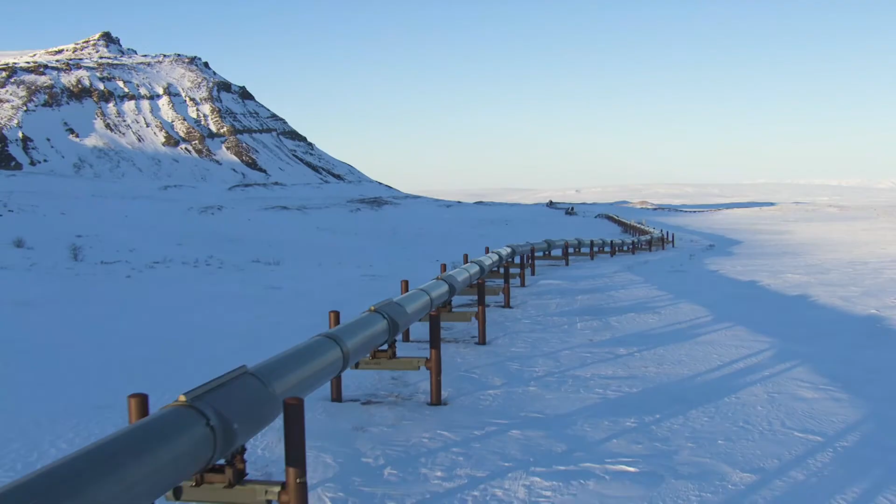Just to give you a little bit of background on me. I've been with Schneider Electric, or Foxboro as it was, for 7.5 years, and I became the offer manager for the level instrument product range in February of last year, right in the middle of COVID, a great time to change roles.

But for most of my time with Schneider Electric, I've been in sales as a district sales manager for the whole process instrumentation portfolio, looking after a region known as NESA locally - Northern Europe and Sub-Saharan Africa, meaning the UK, Ireland, the Nordic countries, and largely the English-speaking African nations. But my time with this organisation isn't limited to that, because prior to that I was part of the sister company Eurotherm in their UK sales team for 6 years. So I've got quite a lot of experience with Invensys/Schneider Electric as we are now.

And that forms part of a 25-year experience that I've built in automation sales and marketing. I started with sensors and safety, moved into more mechanical automation products, conveying and power transmission, smart vision systems and sensors again, data acquisition and process control with Eurotherm, of course. Now instrumentation sales with Foxboro or Schneider Electric, depending on what you prefer to call us, which brings us bang up to date.

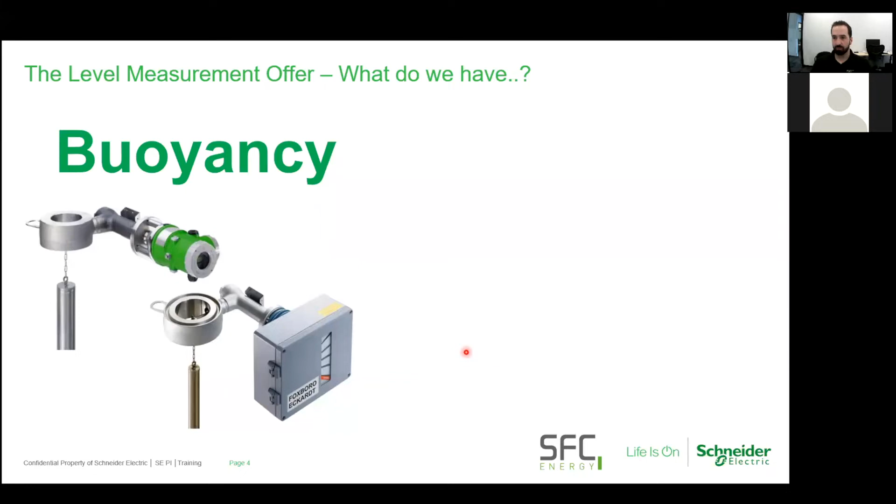So the first question I'm going to pose here is, what is a level measurement offer? Well, we have two strands to this. There's the buoyancy level transmitters, which is former Eckardt brand, then Foxboro Eckardt, and now Schneider Electric. But we're not really going to talk about that today - I'm just showing you that for context in terms of where the radar offer sits within the portfolio.

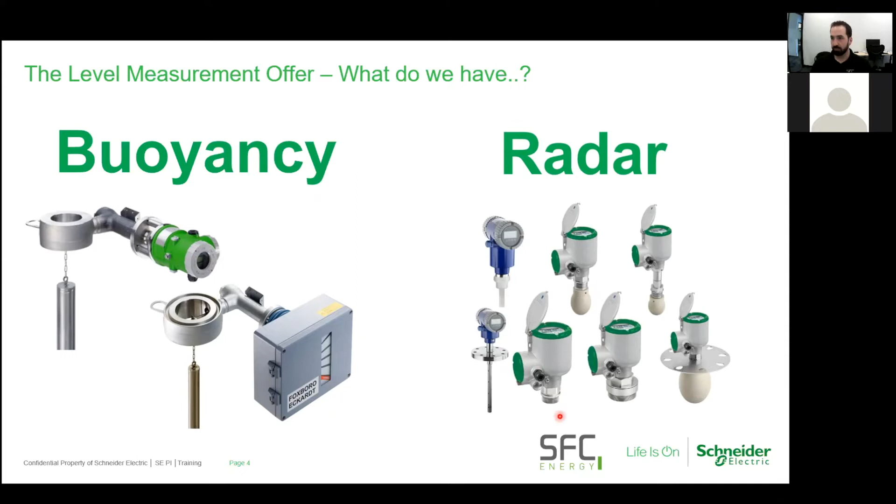So really, there are two major streams to our level measurement instrumentation package, and today we're going to focus on radar. If any of you are wondering, questions are absolutely welcome - please put them in the chat or wait till the end, because I'm going to have about 5 to 10 minutes at the end of this presentation where we can go through some questions. And if we overrun, because we get into some good discussions, then all the better.

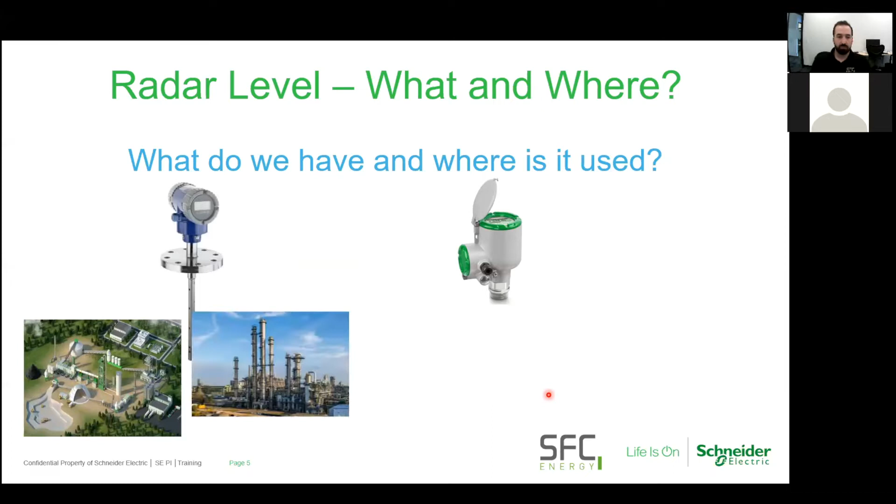So you've seen what we've got, but let's drill down a little deeper into that. Let's not only look at what we've got, but where can we use it? Where can we sell it if you're in sales? Where can you deploy it if you're an end user? Where would you integrate it if you're into systems integration? The pictures you see on screen here are really just a portion of all the applications we could solve with this instrumentation.

As you can see, we've got free space and guided wave radar instruments that are used for liquids measurements in tanks, in open vessels and open channels. And we've got solids measurements for drums, silos, conveyor belting, stockpiles, and even pressurized containers for liquid measurement also. So I'm going to get into more detail on some of these interesting applications in a few minutes.

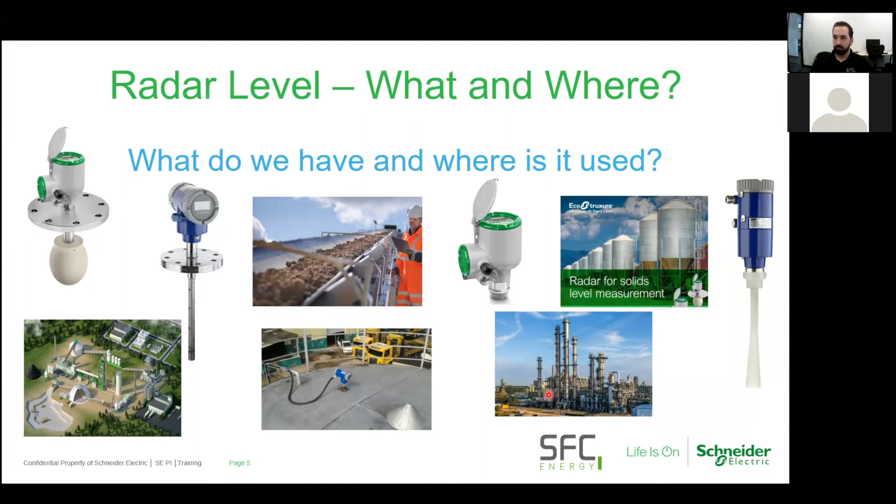But before I do, let's touch a little bit on the technology that I'm describing today. This is not intended to be, and hopefully won't become, a technical lecture about radar measurement level technology - we've done that before, and I'm sure we'll do that again. The focus today is going to be on those applications.

Just to give it all some context, I am going to talk for a couple of slides about why the Schneider Electric radar level measurement instrumentation is worth investing in, and how it is differentiated from what else is out there.

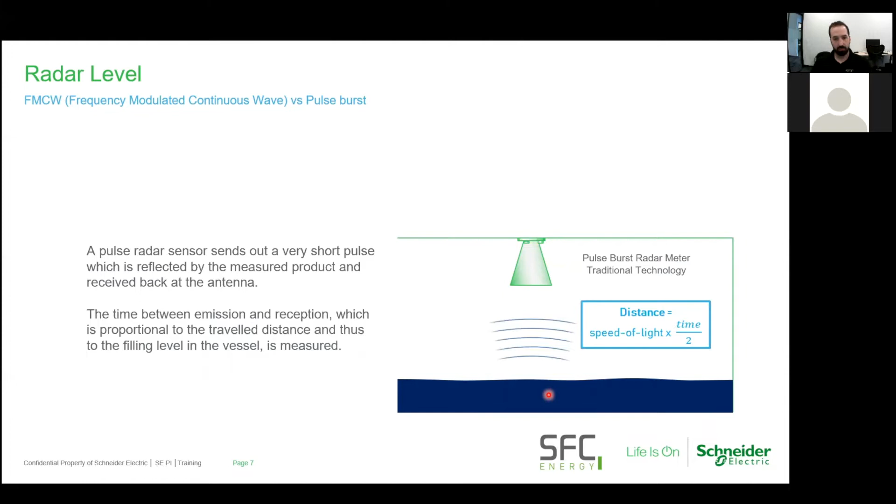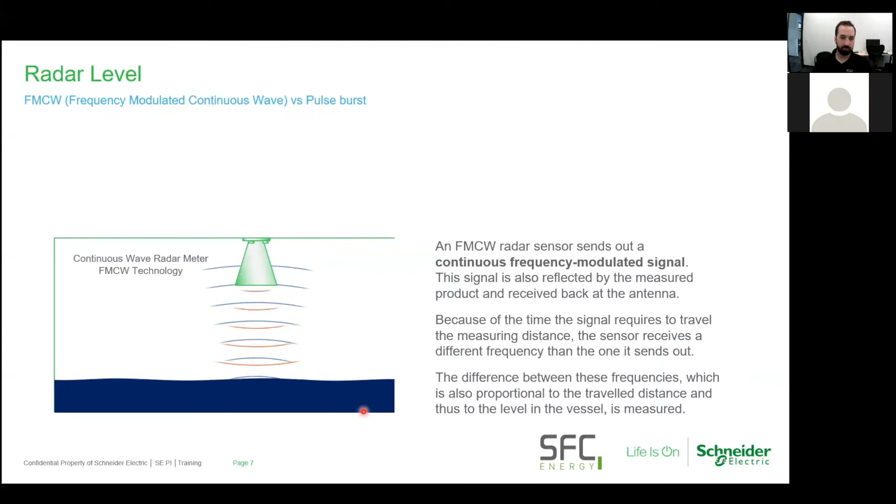We prefer to use this FMCW, continuous wave technology, and the important bit is the M of this acronym, the fact that it's a modulated continuous wave. So we are continually pinging the surface with a signal, and because of this modulation of the signal on reflection back to the receiver, we don't measure time of flight. We actually measure the change in frequency, which gives us a much more reliable measurement for the distance to target, and much more immune to any spurious reflections or noise. So this is a far more reliable technology than the old pulse burst method, which is why we utilize it.

The benefits you get from continuous wave as opposed to pulse burst, you can see the left and right here, is that you're getting much more frequent reflections, a much larger input of signals into the receiver, so you've got a much more robust and strong signal and a greatly improved immunity to noise. So any measurements you do with our radar range are extremely reliable compared to pulse burst technology, and effectively about 100 times more reliable if you count the number of signals received as a measure of reliability.

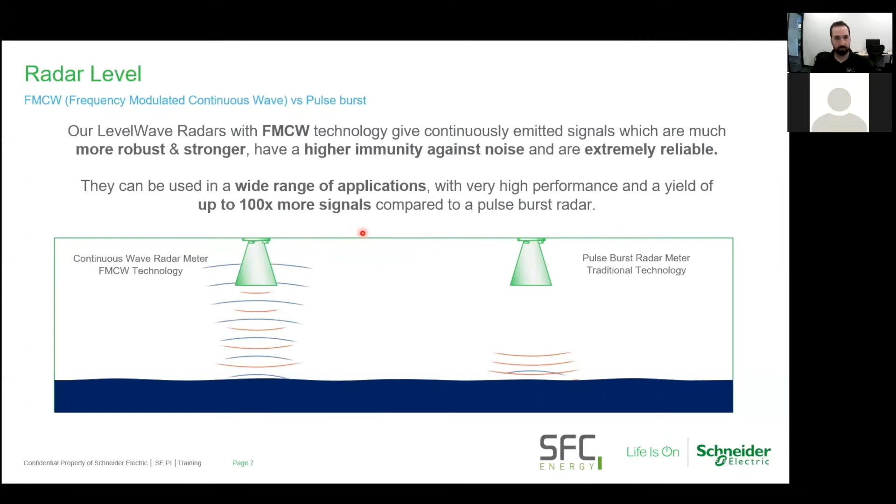So that's a little bit about the technology, and as I said, this isn't intended to be a technical lecture, so let's actually, before we get into the applications, have a quick walk through what makes up our range.

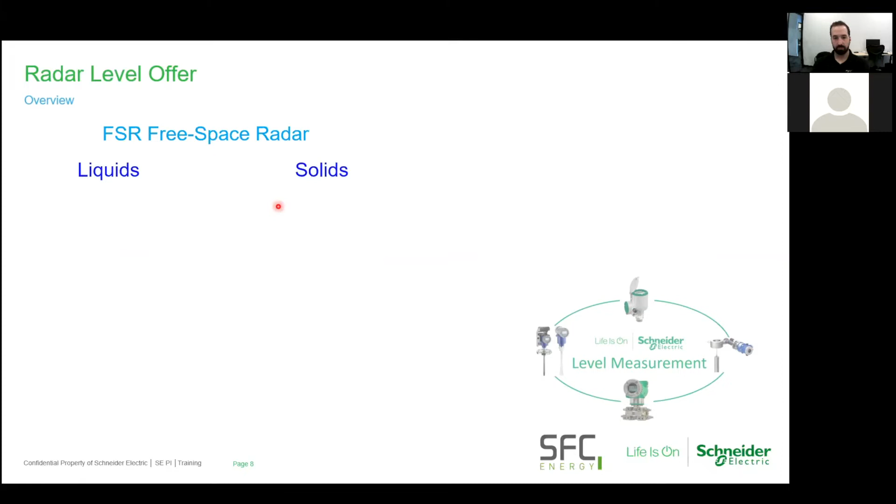So first of all, I'm going to focus on the free space radar. So that's the kind of instrument you just saw in the graphic on the previous slide, the kind of thing that is employed in the front or maybe the rear of your car for distance sensing radars on your motor vehicles.

So for liquids, we have a range of 4 models here, over 3 different frequency bands. The first model, one of the first 2 models to come into the Schneider Electric Radar range was the LR01, which is a 10 gigahertz radar. And this radar is really still very much a key part of our range, because even though it's older technology compared to the ones on the lower half of the screen you can see now, it still finds many applications. It has some distinct advantages in some areas, and I'll come on to those later. But the 10 gigahertz range is perfectly suited to measuring static liquids, so storage tanks, water, drums, and not so much process applications, but more liquid storage. And it's not really designed for measuring solids levels.

But a few years ago, about 3 or 4 years ago now, we greatly expanded the Schneider Electric Radar range with the introduction of 24 and 80 gigahertz band radars. Now, in 24 gigahertz for liquids, we have 2 models: the LR54, which I like to think of as our kind of entry level or standard offer. It's the place where I would start if I'm looking at a new radar level application. I'd start with LR54 and work outwards from there.

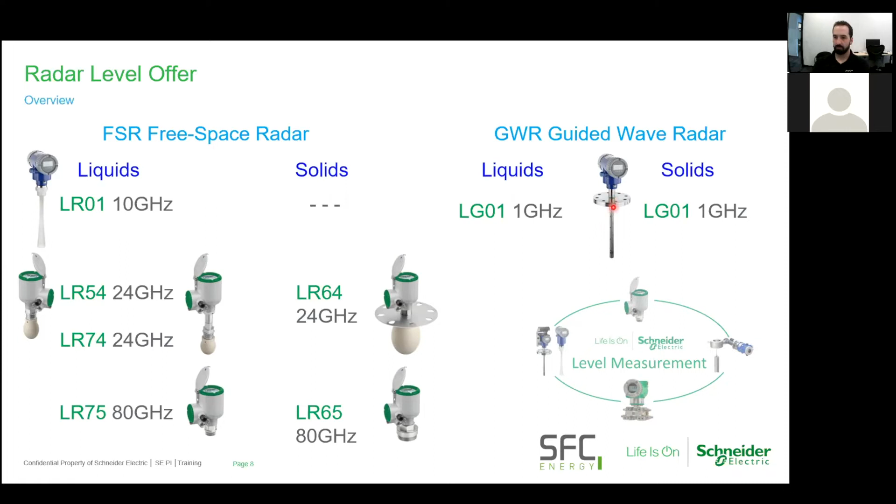So let's now get into the really interesting bit - at least I find it the most interesting, and I hope you will too - the applications where you can solve people's measurement needs with the products I've just walked you through. First, I'm going to do a few exercises on theoretical measurement applications. I have actual case studies to show you shortly, but the purpose of this part of the webinar is to demonstrate the effect that the geometry of your vessel and your process connection can influence which instrument you choose and which antenna you pair with it. So let's go through this process.

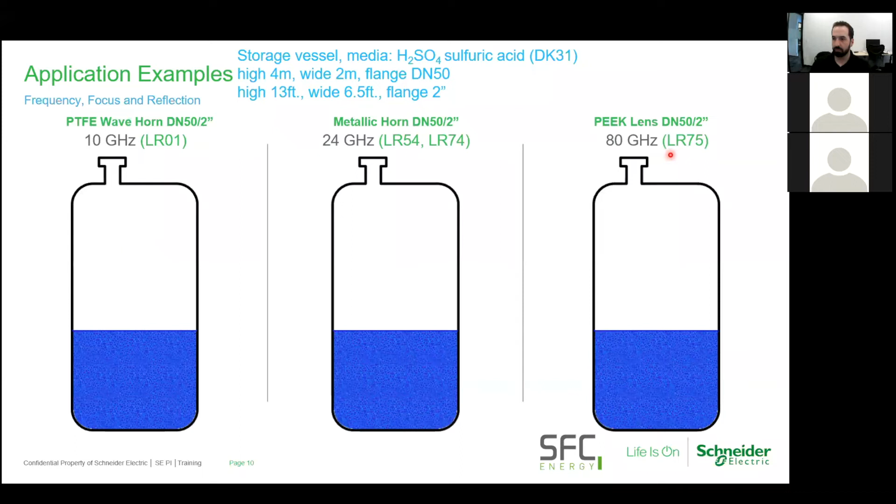For the 24 gigahertz variant, we have 2 models to choose from, LR54 or 74, and again the 2-inch connection really takes us towards the metallic horn antenna. Lastly, the 80 gigahertz radars, both of which have lens antennas, and a variant is available with a 2-inch connection. So let's have a look what that does to our measurement scenario.

As you can see, all 3 devices will adequately measure the level. The influence of the antennas obviously dictates the width of the beam over the measurement range, and even with the lower frequency - the wider beam angle of the 10 gigahertz radar - we could pretty much get close to the bottom of the tank. We may choose to employ the empty tank spectrum algorithm, available in all of our radars, to effectively ignore the curvature at the bottom of the tank, making LR01 effective. But as you can see, the 24 and 80 gigahertz radars both have no problem with impinging on the tank walls, so both would be appropriate for this application.

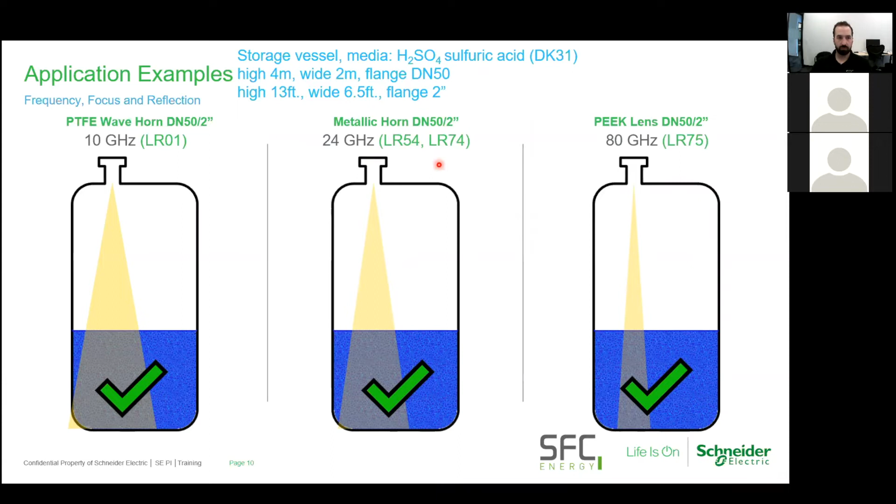So which one would you choose out of these? Well, sometimes the answer isn't technical, sometimes it's commercial, and in that I would veer towards one of the 24 or 80 gigahertz devices, because I don't want to have anything to do with the sidewalls of the tank. I would opt for the 24 gigahertz LR54 because it's perfectly suited to this application, will give us a good strong signal, doesn't impinge on the tank walls, and the LR54 in particular is the better priced option. Obviously what we want to do is not just solve your problem technically, but give you the best commercial solution that will do so. So LR54 would be the choice here.

So let's have another look at one of these worked examples. It's the same tank dimensions, but this time we're looking at aviation fuel with a lower dielectric constant - it's below 2, you notice. And this time we have a 4-inch or DN100 flange connection on the same vessel.

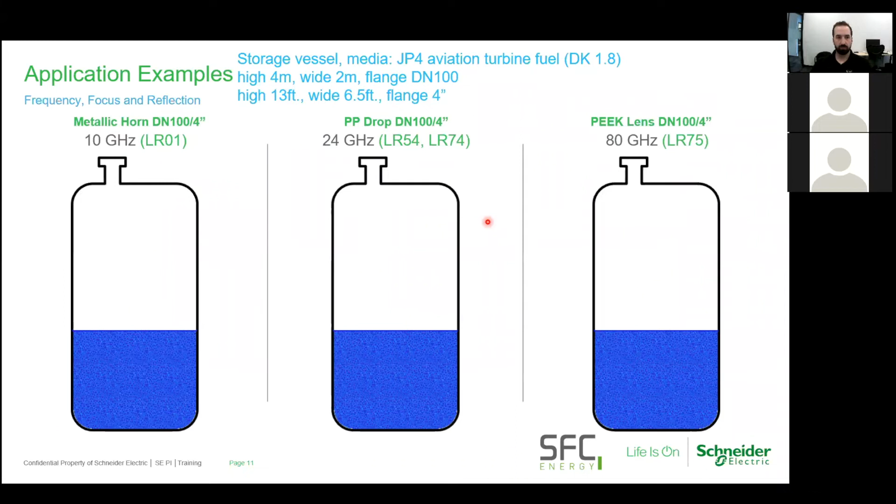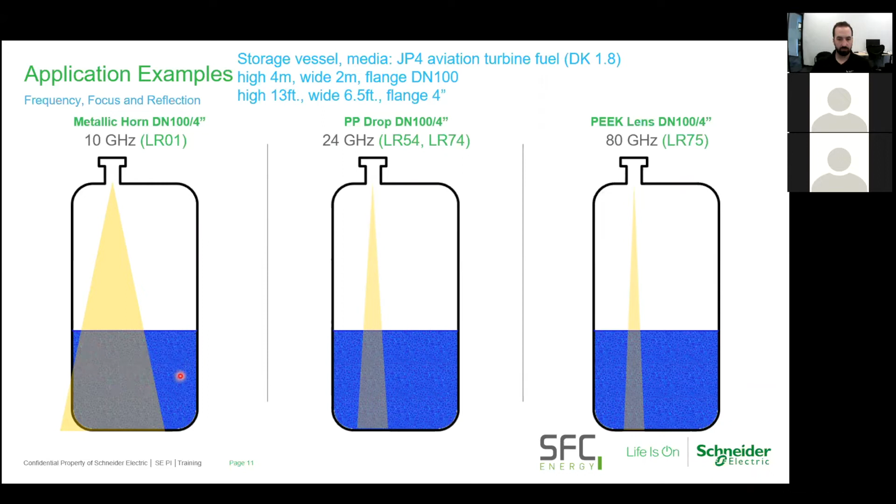If we choose the LR01, this time with a 4-inch metallic cone antenna, we get a little bit more beam spread, a wider beam angle than we had in the previous case. So we may want to consider whether we use this. You can use this device in this application, utilizing the empty tank spectrum software. But I would, again, just like in the previous example, choose to use either the 24 or 80 gigahertz radars. Now, in that, we are nowhere near the tank walls in either case.

Again, my cost-efficient mind would say, okay, 24 gigahertz is good enough, let's go with that - it's lower priced than the 80 gigahertz. Then do we choose the standard version, LR54, or the higher spec version, LR74? Well, when we look at what we're measuring, and this is aviation fuel, I would opt for LR74. It's a higher priced device, but it has a quick-change connection so you can actually remove the transmitter while the device is connected to the process, and it also has, as an extra safety feature, a metal-glass barrier between the antenna and the transmitter, which gives you an extra level of protection in the event of a potential explosion.

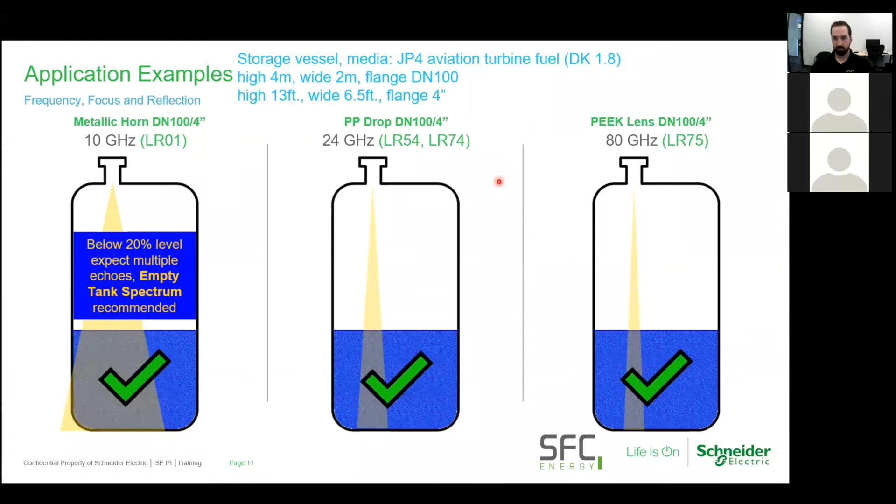I think we've got 2 more of these theoretical examples now before we get into the actual case studies. Hopefully you're finding these interesting.

This time we're looking at wash liquor, so it's pretty much an aqueous solution, but we've got foam on the surface of the liquid, so this is going to be a little bit more challenging. We've got a 4 meter by 2 meter tank, or 13 feet by 6.5 if you prefer imperial measurements, and this time we've got a 1.5 inch threaded connection.

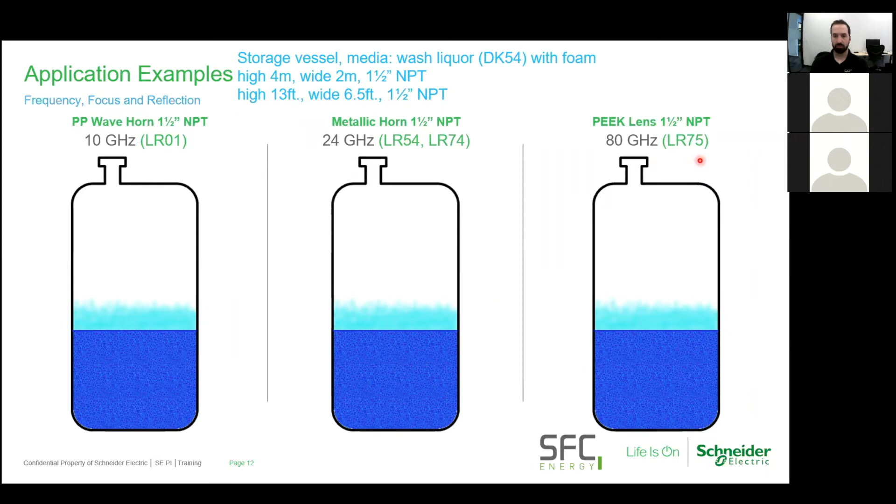So what can we use? We can use the LR01, available with a 1.5 inch NPT threaded, this time a polypropylene wave horn antenna. The 24 gigahertz variant has a metallic horn antenna with a 1.5 inch threaded connection. And for 80 gigahertz, both the LR65 and 75 have lens antennas, and again we have a 1.5 inch NPT variant of that.

So which is going to be more suitable? Well, it looks to me like in terms of beam angle and beam width, you could use any 3 of these. Maybe the lower frequency LR01 isn't ideal if you want to measure right down to the bottom of the tank.

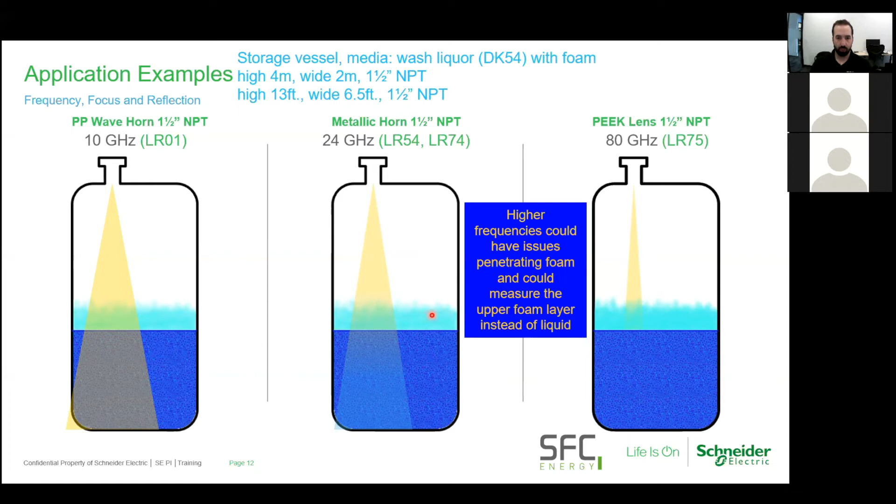But of course, we haven't considered the foam. Now, perhaps counterintuitively, the higher frequencies can give you some problems with foam, depending on the density of the foam in question. You may get some scattering of the higher frequency and therefore shorter wavelengths of the radar signal. So actually, the LR01 might be more appropriate.

But you know what would be even more suitable for anything with foam is a guided wave radar, the LG01, where the signal, if you remember what I said earlier, is concentrated within the waveguide, so it can't really be scattered by the foam, so it will give you a good strong reflection off of the liquid surface. And so that would be my first choice, even though you could, in theory, use any one of these devices.

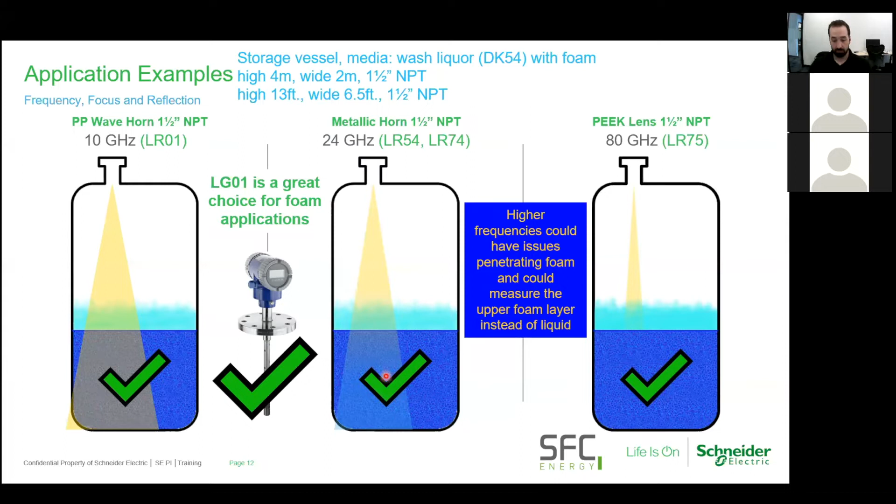You might think, oh yeah, we'll play safe, we'll make sure we don't hit the sides of the tank, we'll go with the narrowest beam, the highest frequency. But this could potentially give us another problem.

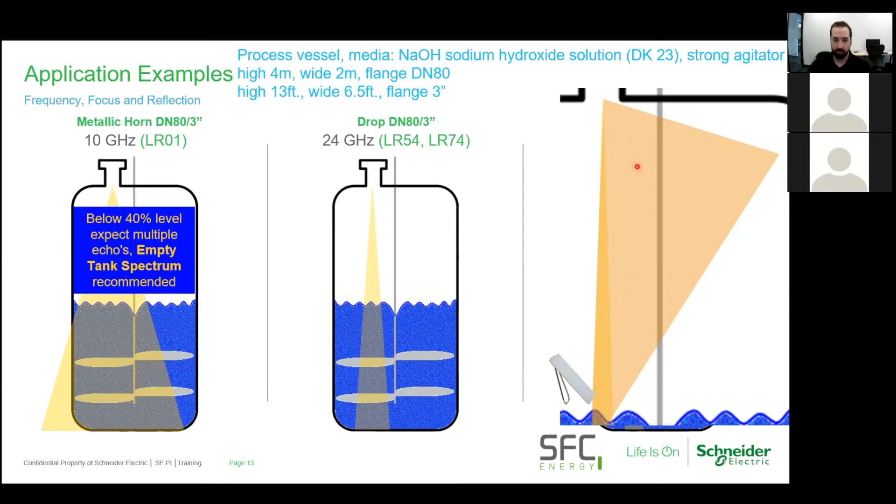When you zoom in, you can see that the ripples on the surface caused by the agitation effectively will act like little mirrors for the shorter wavelength 80 gigahertz radar beam, and reflect much of the signal away from where you want it to be into the transmitter's receiver. So you will get some signal here, but you can get a lot of attenuation of the received signal, so you won't get as much of a strong signal as you'd like.

So really, the one of choice here is the 24 gigahertz radar. It doesn't have the same negative effect from the surface of the liquid. The lower frequency would be best, but of course the beam angle is rather wide. So the optimized answer here is the 24 gigahertz LR54 or LR74.

Sodium hydroxide is not especially explosive, so I'd go with the LR54. That gives you the same performance as the LR74. It's the most optimized for this measurement and the most cost optimized device also.

So you can see there are a lot of factors at play here: price, connection, tank geometry, medium chemistry, and of course other things like agitators and foams.

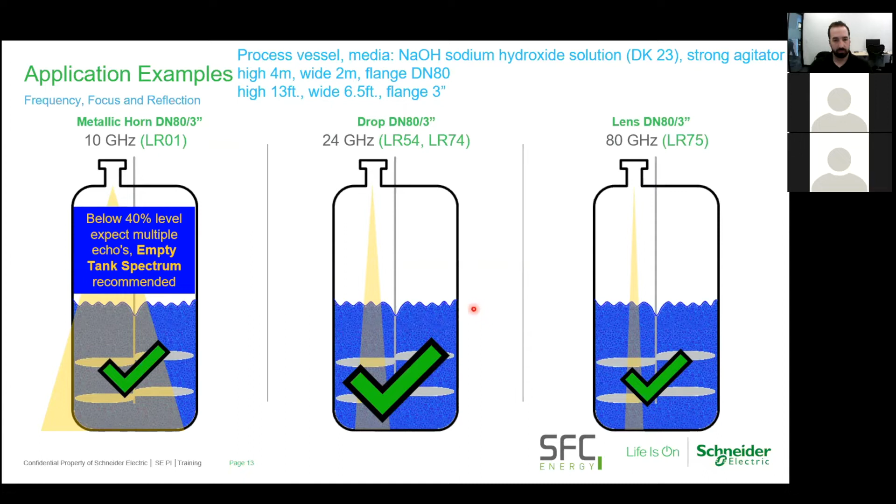What I really like about this drop antenna is that it's optimized for lack of buildup of liquid or dust solids. Unlike a waveguide antenna where you can get a lot of buildup, these are pretty resistant to that.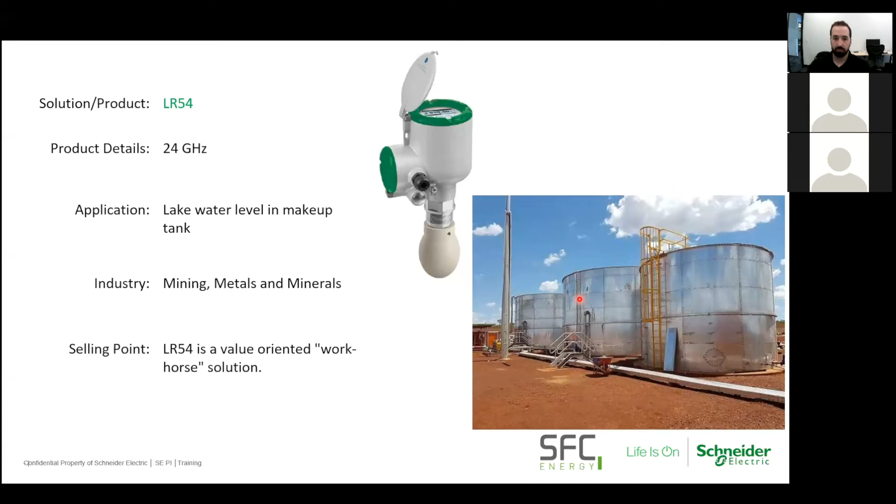Let's look at the next one. This is another example where we used the LR54, but here there's a low pressure flange protecting the transmitter from the process, and we sell a lot of these low pressure flanges, more for device protection than anything else. This is in the chemical industry, where rather than tanks of water, it's a similar kind of geometry - the tank isn't quite as wide, but not too constrictive. We're looking at chemicals that are highly viscous and corrosive, hence we're protecting the device with a low pressure flange.

This customer had previously used ultrasonic level measurement and found it inaccurate and unreliable. Again, it's not too challenging an application - we have a good dielectric constant in the liquid level of this chemical solution. So the LR54 was again the obvious and logical solution to give this customer a reliable and cost-effective solution.

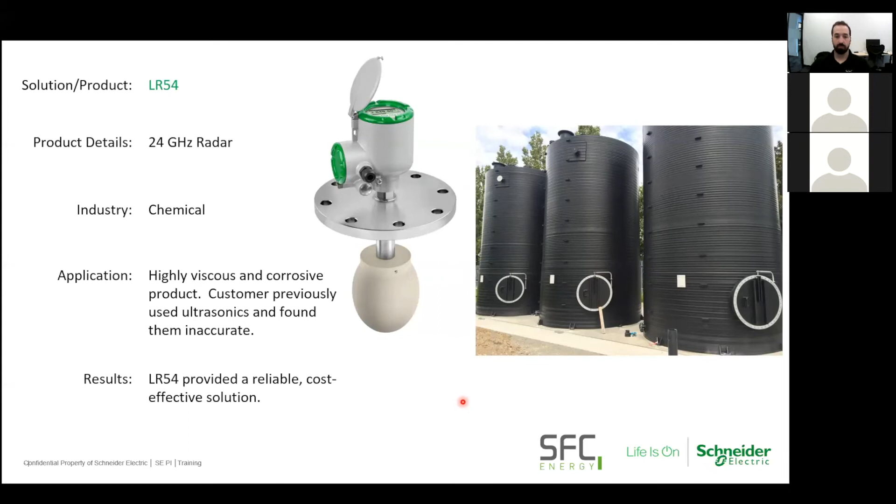Next we'll look at a slightly more challenging one: measuring ethanol in a biofuel production plant. Obviously biofuels are a growing technology, increasingly widespread, and we've managed to get some level measurement success in this sector. In this case we go with an 80 gigahertz LR75 model for a couple of reasons. Let's give a bit of background first.

The customer had been using differential pressure transmitters to measure level, and indeed they still are - just now in conjunction with the LR75 radar, whereas before they used DP alone. What they found was that to do any maintenance on the DP cells, they had to completely empty the tanks to get access. Not the case with a radar transmitter mounted in the tank roof.

The advantage with an 80 gigahertz signal is you can have it relatively close to the sidewalls, because the narrow beam angle allows you to do so. Also, if you've got a low dielectric constant medium like a hydrocarbon such as ethanol, that lower dielectric constant is more likely to be seen by the higher energy, higher frequency of the 80 gigahertz radars. And of course, they are pretty much maintenance free.

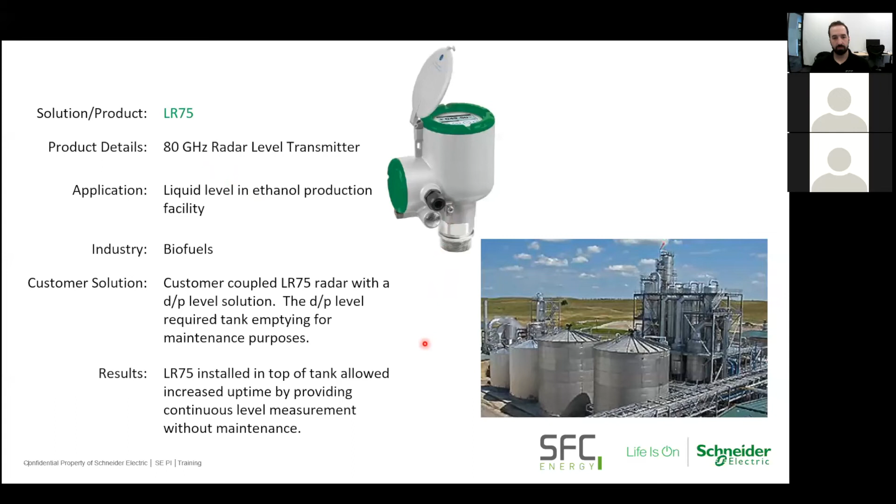Now let's look at an application for one of our oldest radar transmitters. It isn't all about the newer models today, because as I said earlier, the LR01 was one of the first two models that Schneider Electric adopted about 10 years ago. The 10 gigahertz radar is perfectly applicable in many applications, particularly in water - in this case, wastewater. With 10 gigahertz we'll get a good signal of wastewater.

This is in the electronics industry, but the real differentiator, the real winning case for this one, is the fact that you can buy the LR01 as a remote version. The actual transmitter can be separate from the antenna by a distance of up to 100 meters, with a cable connection between - you can see the cable disappearing up to the top of the tank here.

What the customer was having to do before was send an operator up to the top of the tank to check the level measurement - very labor intensive, consuming lots of time. So we've saved a lot of that time now. The electronic display is at eye level, and they can easily do a manual check if they don't want to trust their control system's reported level. More importantly, they're keeping their health and safety officer happy, since people aren't having to climb to the tops of tanks to check liquid level measurements. That's a novel sort of differentiator, but remote electronics is certainly an advantage in this case for the LR01.

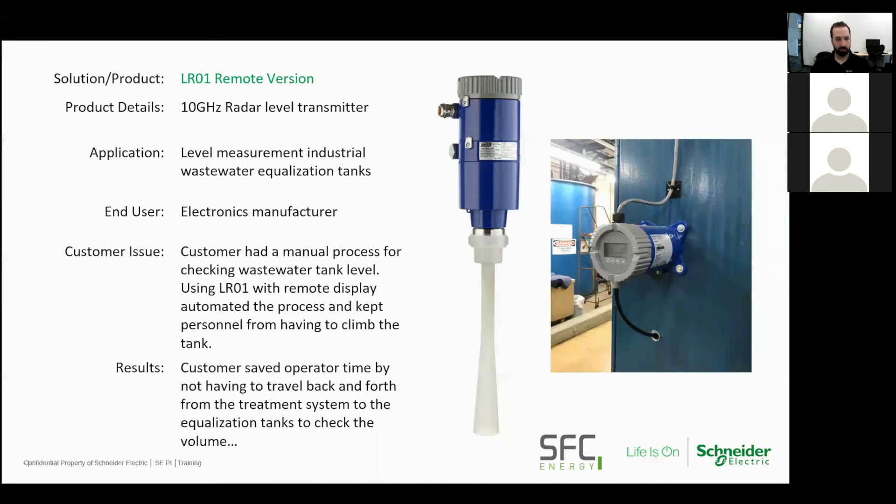So what have we got next? Yes, we're going to take a little break from the applications now, just to have a recap of the similarities and differences between the different models in our radar portfolio.

So on the left, we've got the LR01, which I just talked about in that wastewater tank. 10 gigahertz measures with an accuracy of plus or minus 5 millimeters up to about 30 meters distance. It will get you to 250 Celsius and 40 bar, or 482 Fahrenheit and 580 psi. One of the advantages this model has is its quick coupling. You can remove the top works from the antenna easily while it's still in process, and it has the option for this Metaglas extra safety barrier between the antenna and the transmitter.

And this is also true for the LR74, the eagle-eyed among you will have noticed the same thing here, but I'll come back to that in a moment.

So the LR54, which I described as the kind of workhorse or entry level of the newer radars, more naturally fills the space that LR01 has been occupying to itself for a longer time in our range, but it does have a higher degree of accuracy over a much greater maximum range. It doesn't go up to as high a temperature rating, and doesn't have the quick connect construction. So you'd have to remove the whole instrument, including the antenna, from the process, and we don't have the Metaglas safety barrier between antenna and top works, which we do have, as I was just saying, with LR74.

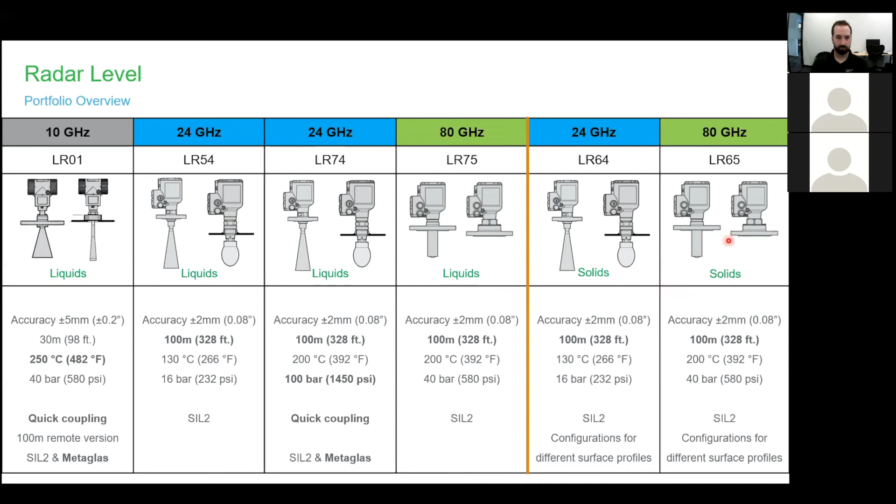Okay, oh sorry, I was forgetting what the slide. We just have a little focus now on our guided wave radar device, the LG01, which I referred to earlier as an option for that tank with foam above the liquid. LG01 utilizes a much lower frequency, but it is all concentrated within the waveguide, so it's still very much applicable for low dielectric constant materials.

Up to 40 meters level in liquids or 20 meters in solids. We really sell most of these into liquids applications. It's not truly optimized for solids, but it does do a decent job. It'll be rated up to 300 Celsius or 570 Fahrenheit, down to around -50 or -58, and up to 40 bar or 580 psi. It also has a couple of safety features like anti-blowout, and like every model in the family, is SIL2 certified. And this one, like the LR01, has a remote electronics option.

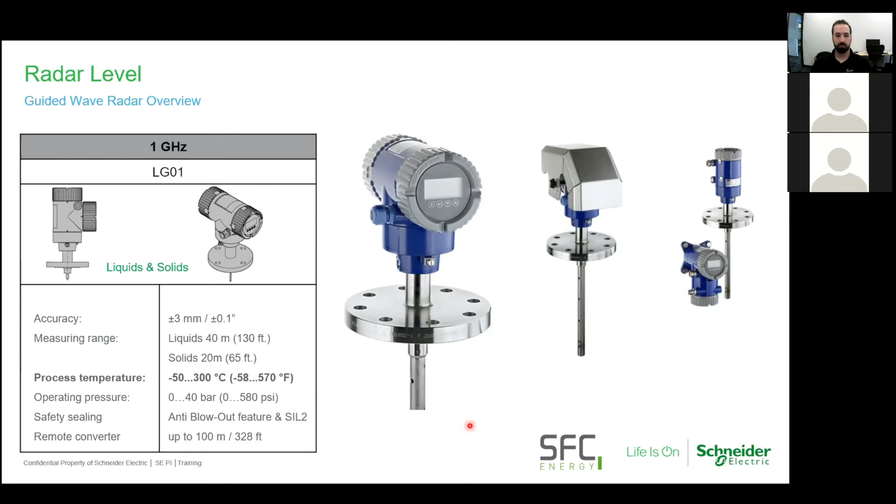So let's now, like we did with the free space radar, try out the guided wave radar in a theoretical example. This time we've got a 10-meter high, 2-meter wide tank with a 3-inch or DN80 connection, and we're looking at gravel. So we've got a low to medium kind of dielectric constant for this material.

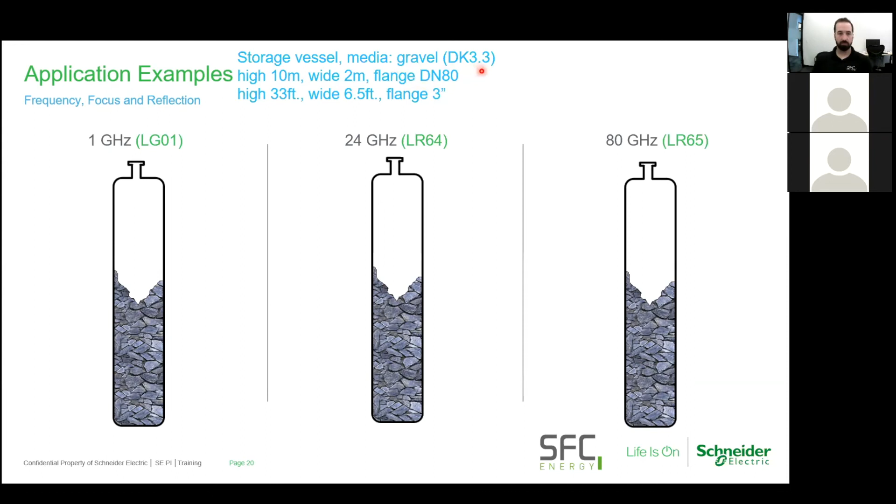We can't use LR01 at all because it's not for solids measurements. So we can use an LG01 with a guided wave. You need to be careful if you've got really large, dense solid material. Traction loads on a cable style antenna can be a problem.

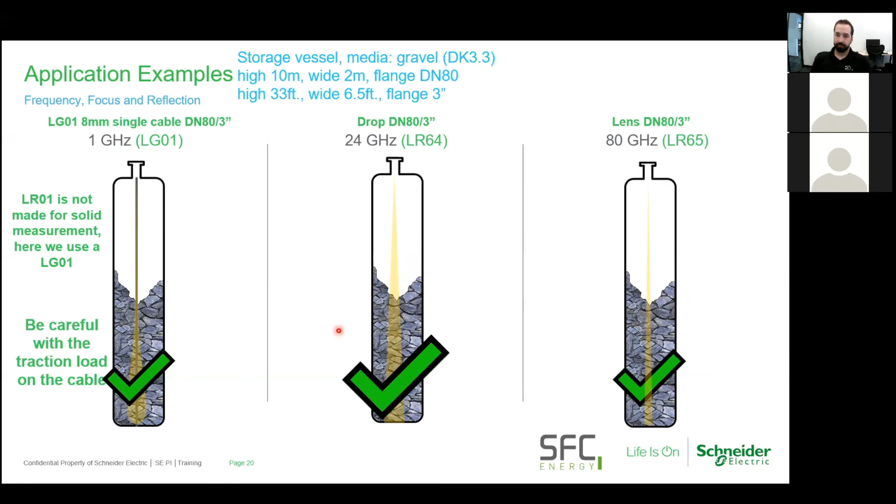Not so much of an issue though with 24 or 80 gigahertz free space radars, LR64 or LR65 are the models in question. Really, while any of those would be a model of choice, I would probably recommend a customer uses the free space radar at 24 gigahertz. Very easy to deploy. We don't need to worry about the cable and any traction loads, particularly while filling or emptying the storage vessel. There's no problem with beam width, so we don't need to go to the more expensive LR65. LR64 24 gigahertz is very much the appropriate device.

We would have consideration for the mass of the solids on filling, as I said in the previous example. The 24 or 80 gigahertz radar are both quite appropriate for this application, but I would select the 80 gigahertz because of the very fine particle size and the fact that the dielectric constant is a little lower than the previous example. We're going to get a much more solid, reliable signal received back into the transmitter with the 80 gigahertz version.

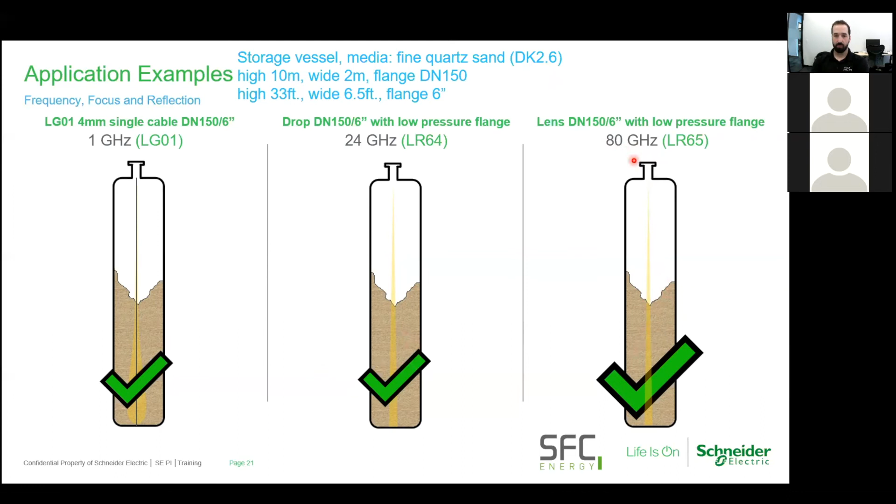Okay, so let's now look at some real-world examples. I don't have a photograph from site of this one, but I do have a diagram taken from the customer's details of his application, and this is in an industry that we're seeing increasing applications for radar measurement, and this is plastic hoppers.

So what we have here is PET pellets. This is a low dielectric constant material, but also creates a lot of dust. So we've got two problems here, and this is why we've chosen the LR65 80 gigahertz radar, because it really is optimized for dusty atmospheres. And that combined with a low dielectric constant of the material, the stronger reflection you're going to get from a high frequency signal really dictates that this is by far the best option to choose for this application.

So we've got a small radar beam. We focus the energy exactly where we want it. We see through the dust because of the higher energy of the higher frequency signal, and this has worked very successfully in this and many similar applications.

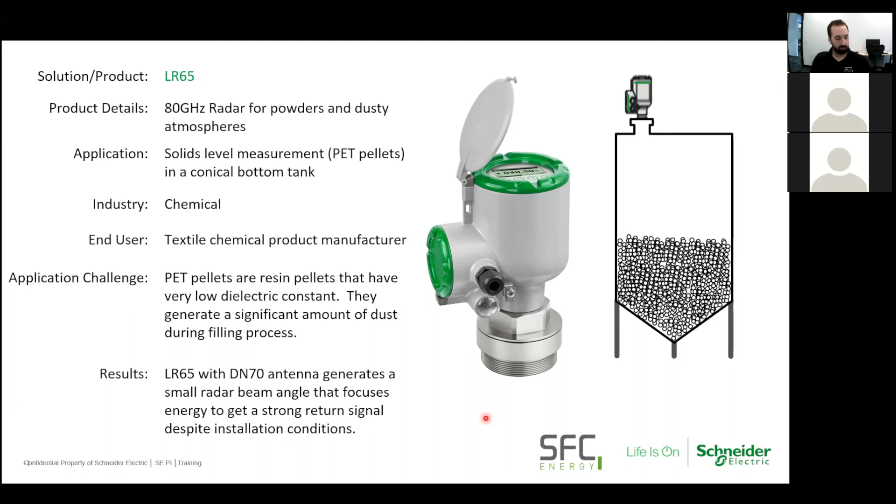Right, now same device but a different kind of application. Again, it is solids, but what we're looking at now is sand in sort of aggregate quarry. And so we're filling a silo from this inclined conveyor of this sort of sharp sand, and we need to guard against, for this customer, silo overfill. So the fact that we have continuous measurement is really important. And again, it's a low dielectric constant material, so again, we choose the higher frequency signal for better signal to noise ratio.

And of course, if you remember, with both of the solids radars, we have near flush mounted lens antennas. So we have minimized deposits on the antenna.

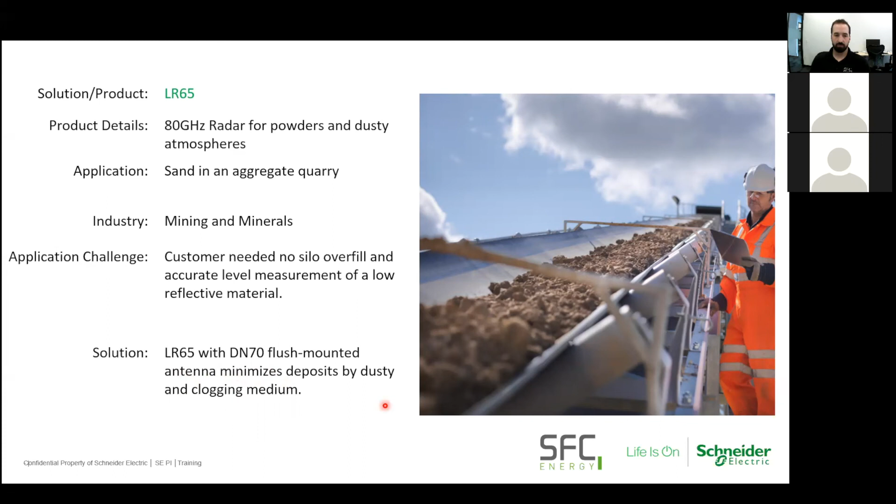Okay, so we're just coming towards the end of the presentation part now. Before we get to questions, I just want to quickly walk you through this table, which doesn't just look at radar, it looks at several measurement technologies, all of which are available from Schneider Electric in collaboration with our friends at SFC. You can measure level, of course, as I mentioned in one of the applications, using pressure transmitters. As you saw on one of the very first slides, we also have a buoyancy level measurement system, which we're not really focusing on today. And then we have the radar family, which I've described to you today.

Now, there are several things at play, as I mentioned in those theoretical examples. There's the application type. Is it liquid? Is it clean or is it dirty liquid? Is it static as a measurement? Are we changing density? Is there an interface? Is there agitation? Is there foam? Are there solids? If it's liquid, what's the viscosity like? All of these have an effect.

And what you will see is that no one measurement technology can measure absolutely everything. There's no column that is completely green. And it really is, to use an old phrase, horses for courses. And what I strongly recommend is, if you have a measurement level application, is to reach out to us at Schneider Electric, or if you're a customer, reach out to SFC, who obviously have the support of many people in the Schneider Electric organization to advise on the right solution for your measurement application.

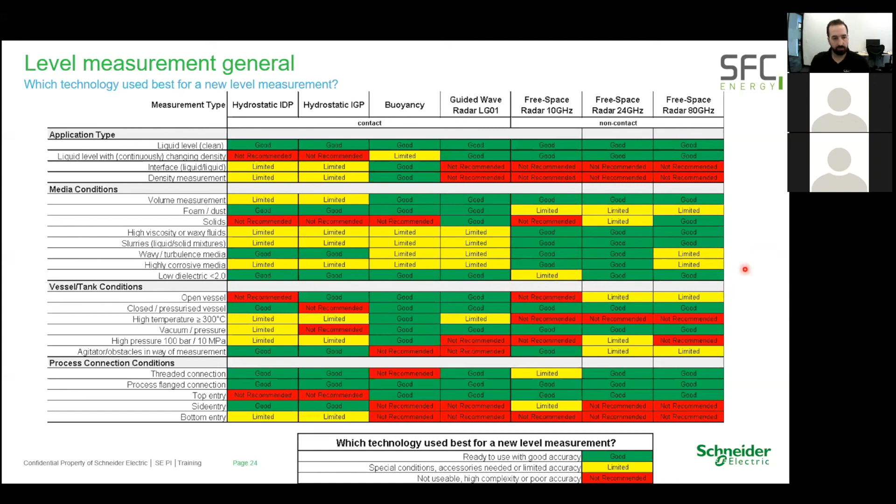And of course, this table is available to be shared, should you want it as a ready reminder in the future. So I think that pretty much concludes the presentation. If you do have any questions, please feel free to bring them now. I'm going to unshare the screen and go back to the presentation. We'll go back to the meeting window.

Hopefully, yes. So John, the one question we had in the chat - I'll unmute everybody in a second - the first question was, are any of these liquid sensors suitable for explosive atmospheres such as sewer wet wells?

Yes, they're all pretty much suitable for that. As I said, the two models in the free space radar which have the metaglass barrier are actually designed with this kind of application in mind - that's the LR01 and the LR74. But all of the radar devices I've talked about do have a number of certifications for this kind of application. So we've got ATEX, IECEx, and I can't remember the end of the other - my mind's gone blank, but certainly, yeah, we do have explosion-proof certifications.

Okay, any other questions? There isn't any other questions in the chat. I have set it up so you could unmute yourself. I see George already unmuted himself, so I'm sure he has 100 questions for you.

George? Yeah, question on - you talked about a foaming application, which we have a lot of, and then you recommended the lower frequency unit to measure the liquid level versus the 24 or 80 gigahertz to actually - won't possibly hit the top of the foam. But if you're not hitting the top of the foam, and you have the chance of overflowing the tank with the foam, would you recommend, if they want to know the level from the top, to use the 80 gigahertz to know where the foam level is?

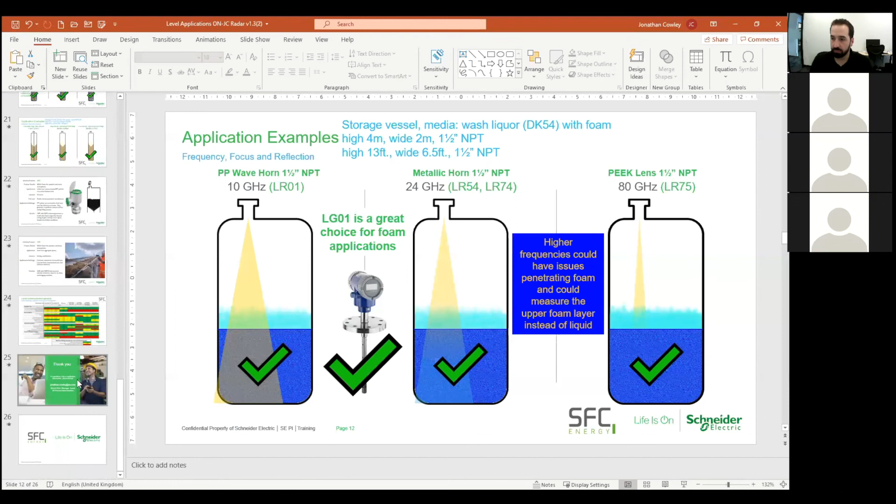So there's no more questions in the chat here, so I think that's pretty much it for questions. Okay, well, all I will say in conclusion is really to encourage anybody on the call, whether colleagues or customers, if they think of anything they want to ask later, they can of course contact me directly. My email address was on that last screen, but they can also field questions through you and your colleagues at SFC. Either way, I would like to help anybody who has a question or an application, or God forbid, a problem with a level measurement. If I can help, please don't be shy to ask.